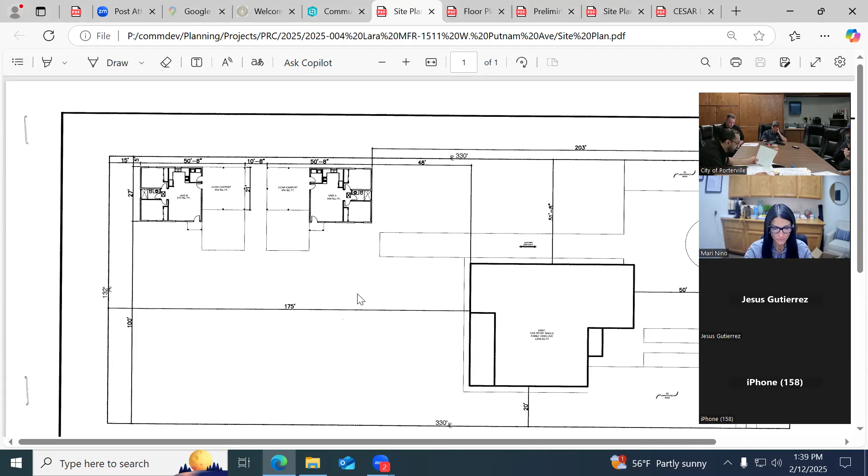If you do propose any future signage, multifamily projects are permitted one building-mounted sign and one monument sign not exceeding 32 square feet. And that's all comments from planning. With that, we'll pass it along to the fire department with Clayton.

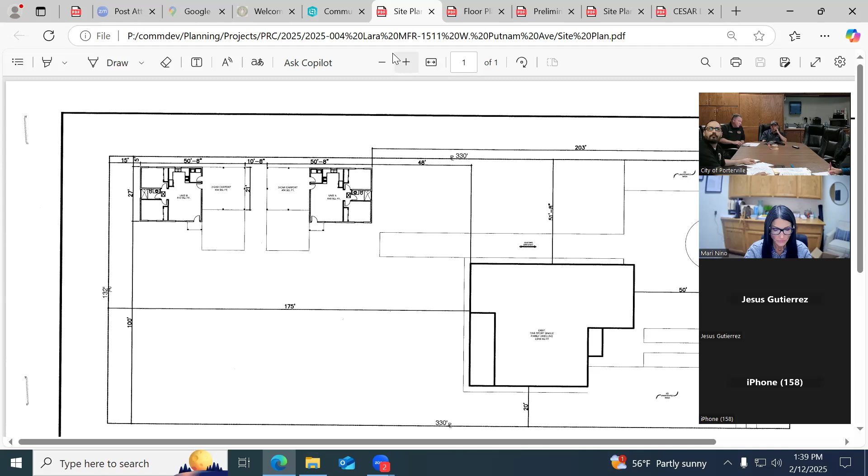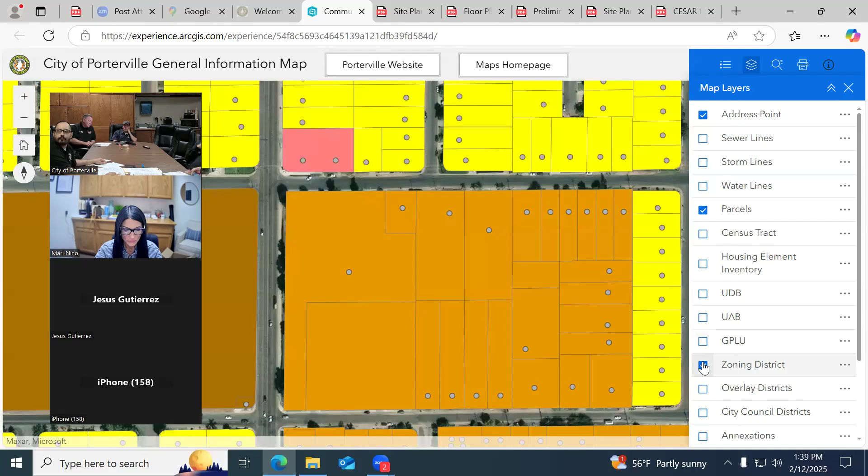So the project shall comply with the latest applicable codes. Fire hydrants shall be placed at spacing no greater than 300 feet for commercial, multifamily, and mixed-use projects, measured as the hose lays, not in a straight line or with a radius.

Where two or more on-site hydrants are required for the project, the fire hydrant shall be on a looped system. Depending on the location of existing fire hydrants and required fire flow, additional hydrants may be required. All hydrant locations shall be approved by the fire department.

On-site fire hydrants and mains shall be provided where required by the code official. Fire hydrants located across a public street shall not be utilized for calculations or considered available to meet fire flow and/or FDC connection requirements for projects. No structure shall be greater than 400 feet from a fire hydrant.

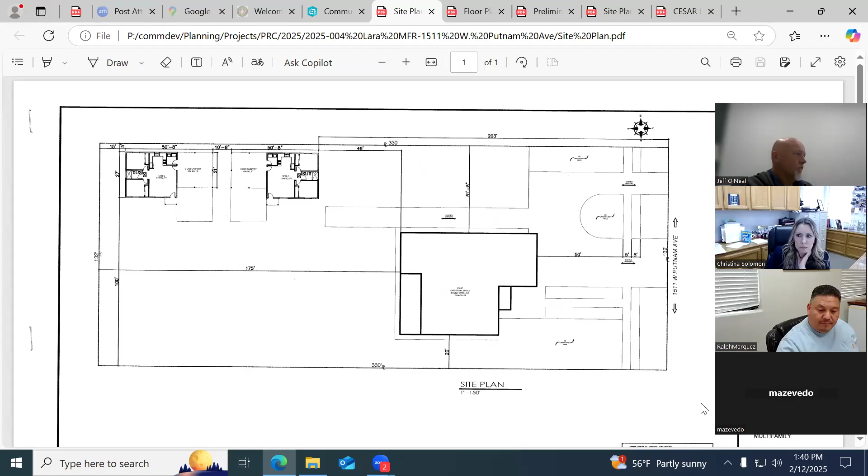All hydrants must be in place and accepted by the fire department prior to combustibles being brought on site. If common driveways are 150 feet or greater in length from the public street, the fire department access road and required turnaround shall comply with the currently adopted edition of the California Fire Code. You will need to show this area designated on the site plans.

An approved fire apparatus access road shall be within 150 feet of all portions of the exterior walls of the first story of the buildings, as measured by an approved route around the exterior of the building. It is measured as the hose lays. Please show this designated area on the plans as well.

Required fire apparatus access and turnaround signage and markings shall comply with Appendix D of the California Fire Code and the California Vehicle Code. Maintain a minimum of 20-foot roadways for fire department access, which has to be an improved all-weather hard surface. Address numbers shall be posted on the buildings and shall be visible from the street. Installed numbers shall contrast with their background. The project is to meet the minimum fire flow requirements per the table in Appendix B of the most recently adopted edition of the California Fire Code.

So, are there any questions? It's standard comments, so there will need to be some modifications to what was submitted. Whether it be you show and designate the fire lane and turnaround to keep the buildings at their locations, or you move the buildings closer.

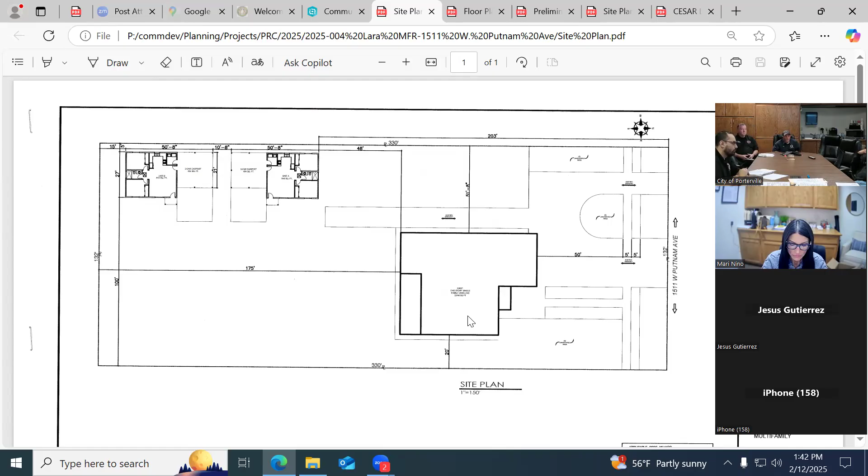Next with our police department, Mark, any comments on the project? No, sir, no comments. Thank you.

And that's all comments from the departments. Does the applicant have any questions at this time? Is it a requirement to make the fence?

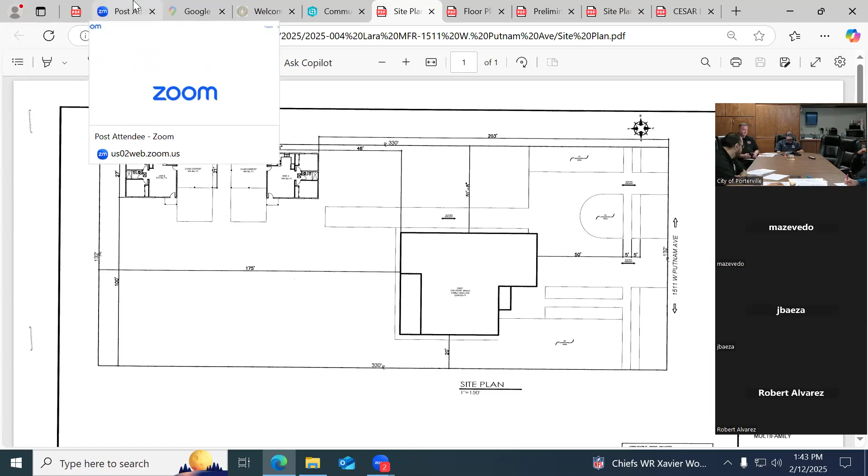Not a requirement, but if you do want to upgrade your fencing, we just provide those standards. But yeah, just again, identify areas like the private open space and the common open space for the development, which are just identifying on the site plan and meeting our minimum standards, which is 100 square feet per unit.

Hey Oscar, let me just chime in here for engineering. Right, Javier? So I know all the public improvements were installed with the house, but with these units, they'll just require utilities to go back there, water and sewer services. Thank you, Javier.

Yes, and then we'll compile each department's comments on a letter, and the applicant should receive them in about 2 to 3 weeks from today's date. Okay, thank you. Thank you.

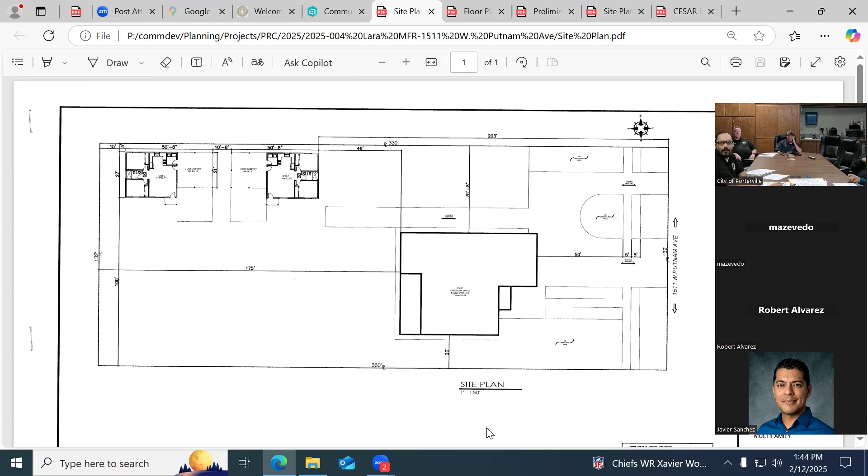Next we have item number 2, which is PRC 2025-005. Want to join us at the table?

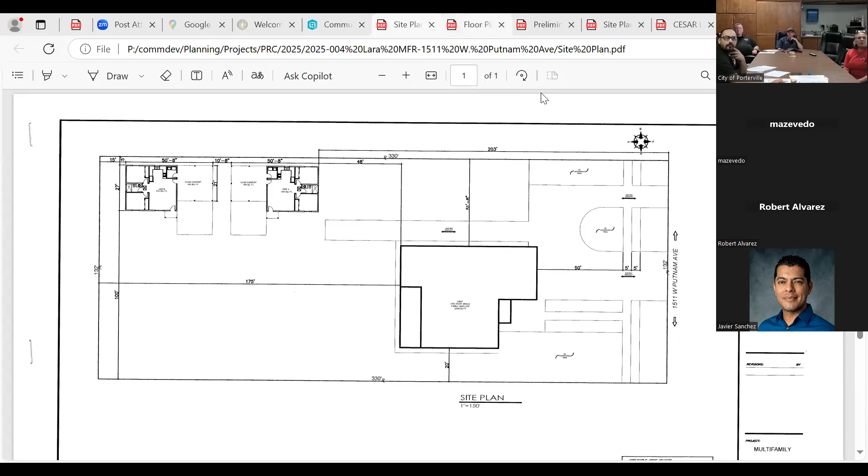All right, so we have the next item, which is PRC 2025-005. The applicant is proposing a change in occupancy from the previous use of retail sales to instructional services located at 234 North Main Street. The property is zoned downtown retail north of Olive and also has a general plan of downtown retail. The property also is within the downtown overlay.

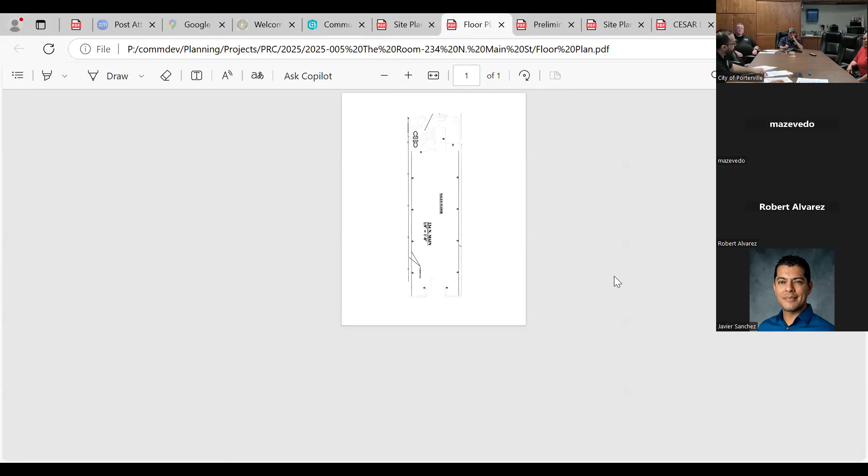As far as comments from planning, the use is a permitted use within the DRN zone district, which falls under instructional services. Comments from planning would be majority related to any signage that you'll be proposing for the establishment, complying with chapter 305 of the development code and also our downtown design guidelines.

Signs are required to be illuminated, either internally lit, or you can also have external lighting for those signs, and those are the wall signs. You can also have window signs not exceeding 50% of the area.

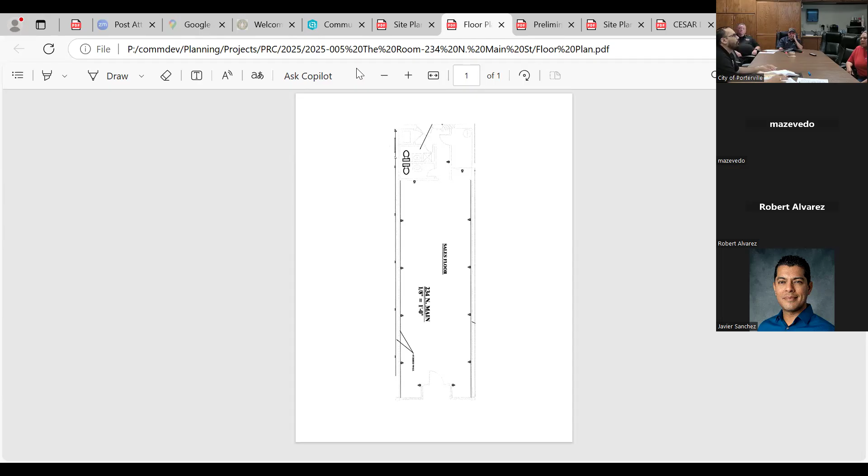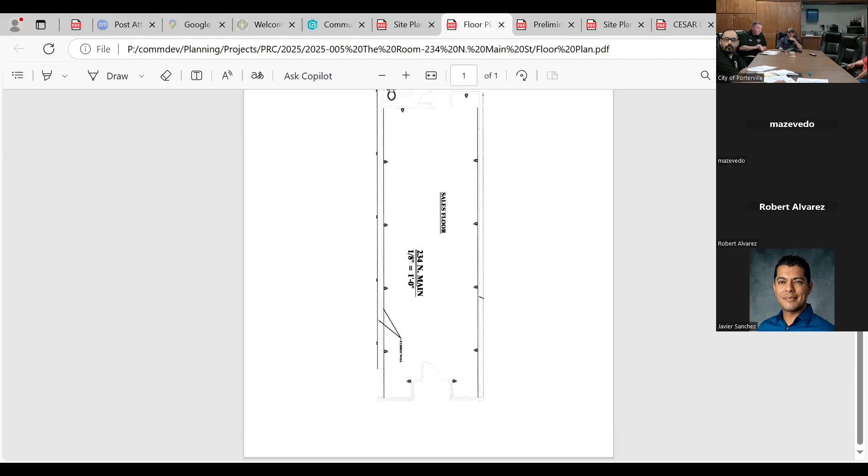Okay, those are all comments from planning, and next we'll go with fire department. For this project, it shall comply with the latest applicable codes. The occupant load needs to be determined so that it can be verified by the building and fire departments. Once that's determined, the occupant load will need to be posted inside the building. Fire extinguishers shall be placed to comply with the currently adopted edition of the California Fire Code.

Fire extinguishers should be no further than 75-foot travel distance from each other, mounted in a readily visible and accessible location, no closer than 4 inches to the ground and no higher than 48 inches to the top of the extinguisher. Knox box access would also be required.

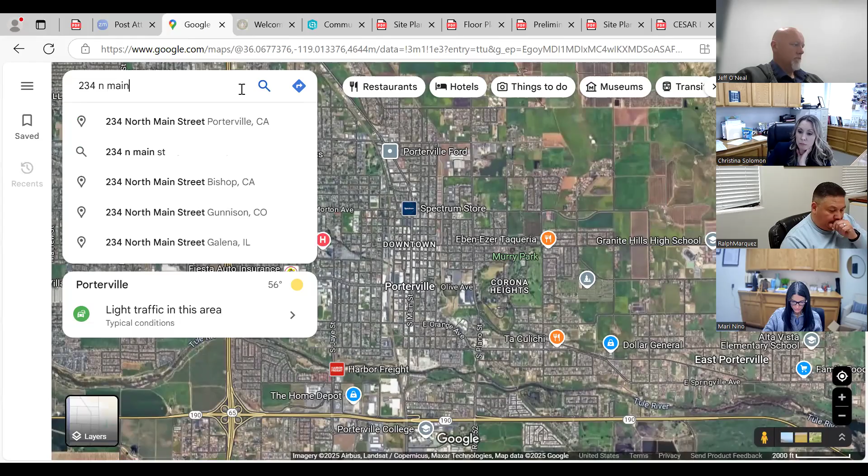That building is under one ownership, and it is sprinklered, so there may already be a Knox box on the building. We just need to verify based on the distance and location — we may just include that suite in the existing box. So that's it from the fire department.

Regarding the window sign, yes, that is allowable under the Porterville Development Code because it doesn't exceed 50% of the coverage of the window.

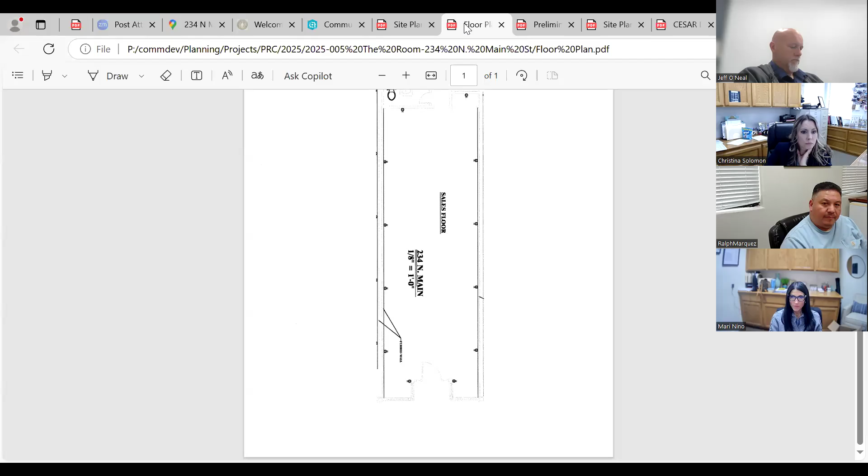If you want to propose any signs on the wall of the building, it will require a permit and must meet our minimum standards. Thank you. Next with our building department, James.

As Clayton mentioned regarding occupant load, we will need the exact measurements of the floor area. The building is sprinklered, which is good news. Based on the measurements of the building, we would go to the code book and figure out the occupant load based off of that.

The only thing I see is if the occupant load exceeds 50 people or more, your second exit — the back door — would have to swing out instead of in, and it would have to have panic hardware, like a crash bar. Then you would have to install some exit signs, the lit-up ones that say exit.

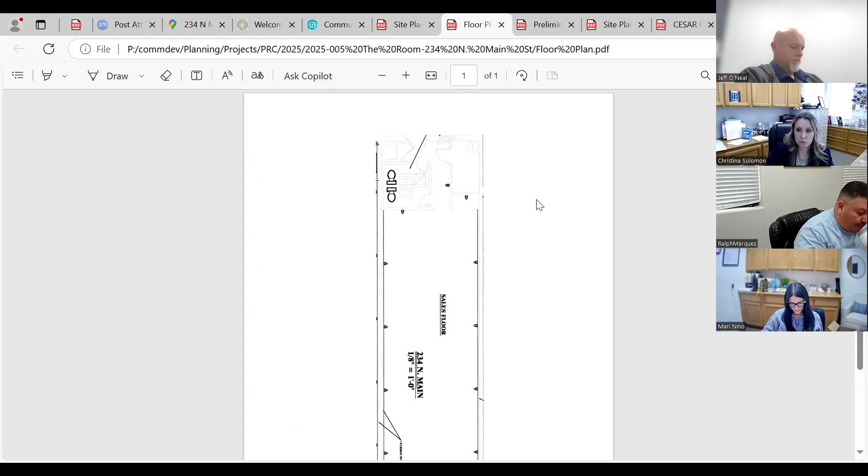They already have those. You would also have to have emergency lighting in there, so if there's a power outage, lights would come on. But this is only if occupancy is over 50.

To determine that, we need more information from you — the square footage, some measurements in there.

So if you could just get back to us on that, we can figure that out pretty quick and help you out, because it's been closed for about 3 weeks. We really just need the internal measurements so that it can be calculated.

Every room, every open space — just those measurements. Your draftsman can get that for you guys, whoever prepared this.

Thank you. Next with Javier, with engineering. For this one, engineering has no comments.

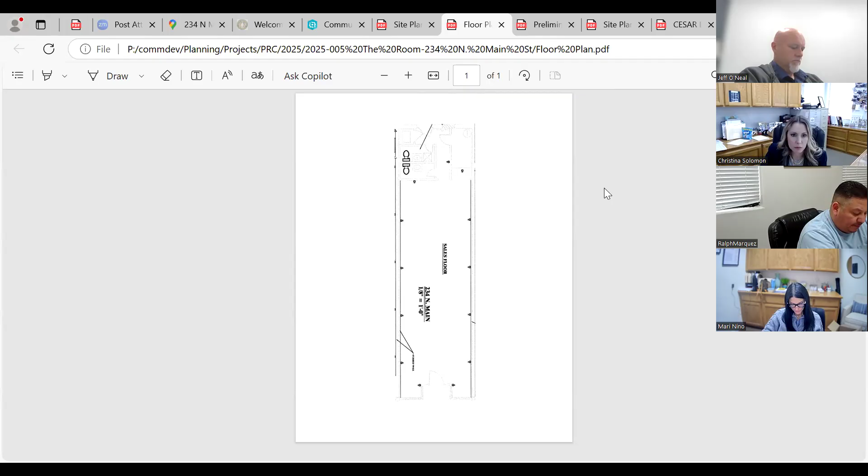Thank you, Javier. Next with Public Works, starting with Robert — no comments. Thank you, Robert. Joe, any comments? No comments. Thank you. Next with our police department, Mark — no comments. Thank you, Mark.

Does the applicant have any questions at this time regarding today's project? I do — once we get the square footage sent over, how soon can we start having the class again?

We've been out almost 3 weeks. Have you applied for your business license? Yes. Okay, after this process, you will receive the letter in about 2 weeks from today's meeting.

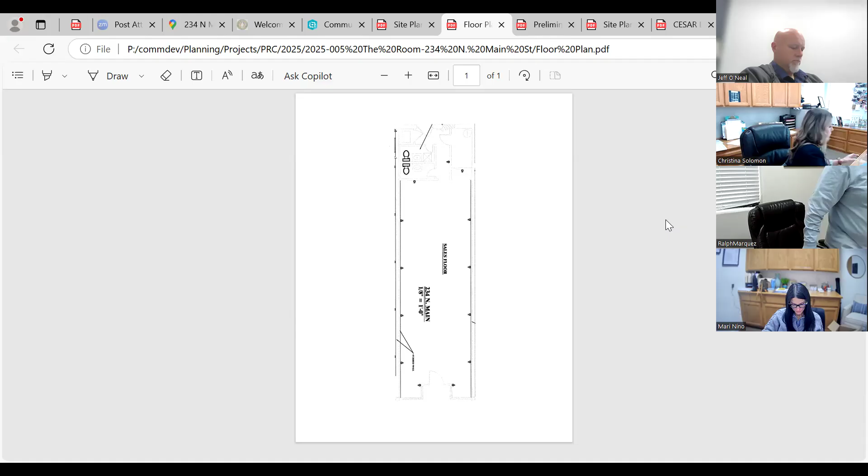If you're able to meet all the department's requirements, then we'll be able to sign off on the business license. Each department would have to sign off on it. For planning, it is permitted, so it's just about complying with the other departments. The sooner you're able to get those measurements, the quicker we'll be able to proceed.

So do we have to wait an additional 2 weeks? No — as long as you're able to get your business license signed off by each department, we'll make sure to review your application against whatever requirements each department has. We're not going to be able to sign it off yet, because we have to make sure it would meet those requirements.

Right, all the comments we just mentioned — but the sooner you can get that to us within those 2 weeks, just bring it in and drop it off to us, and we can get that started. That way, if you need to make modifications at the back door, you can get a contractor and get that process started.

Okay, thank you. Any of that stuff — say you have to do the back door, add emergency lighting, all that stuff — you would have to submit for a permit.

And if everything is up to par, the only thing would be the square footage. We need to determine what else is required, and how many people, so the longer that takes, we can steer you down a path to get started making any modifications you need, or rule out that modifications may not be needed.

And that open space there, there's nothing in there, no furniture, no workout benches. Nothing, it's as is, just an open room. Sooner we get that, the sooner we can help you.

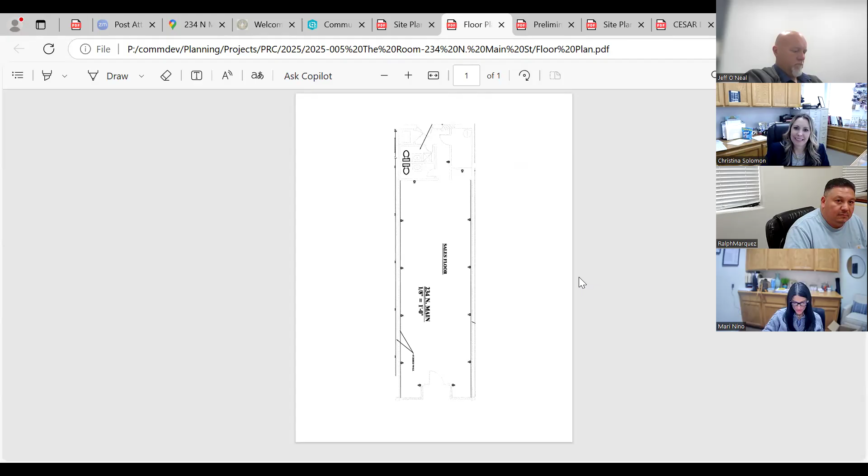To your left. Thank you, all right, thank you.

Next we have item number 3, which is PRC 2025-006 for Villas at Winding Creek. All right, let me go ahead and share my screen here.

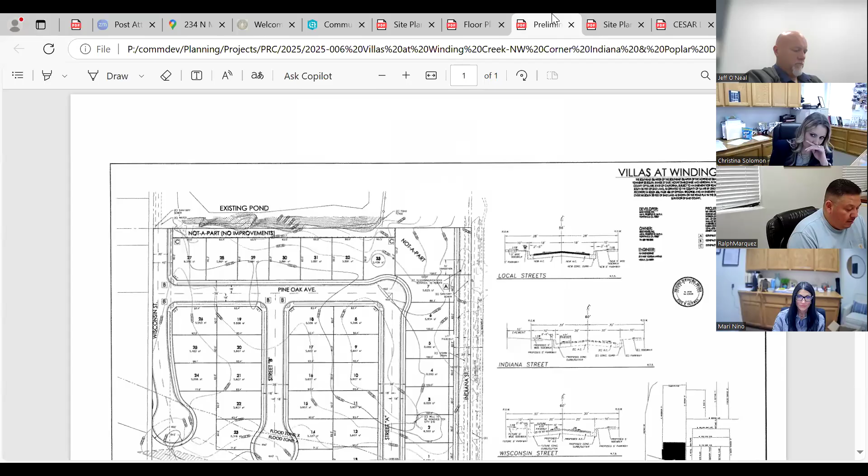So we have the applicant proposing a subdivision map: a 33 lot, single family residential subdivision. It is located on the northwest corner of Poplar Ditch and South Indiana Street. The project is zoned low density residential and has a general plan land use of low density residential.

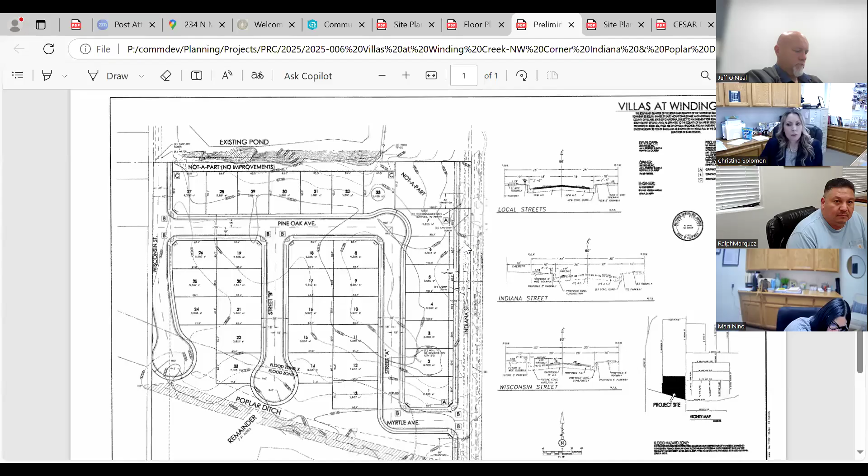For the planning side, I'm going to go ahead and present the comments. The applicant is proposing a subdivision map which requires entitlements. First, we would have to go through a tentative map, there's an application for that and some fees. The fees for a tentative subdivision map is $3,004, plus a $39 per lot fee.

The project will require a CEQA review of the development, which our environmental consultants would prepare the document for and make the determination for the level of environmental review the project would require. The project will also require a public hearing for the tentative subdivision map.

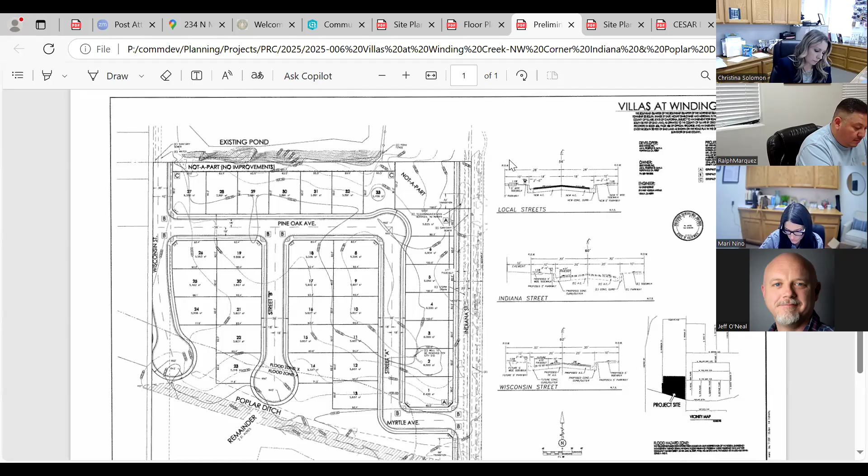As far as comments related to the design of the project, there are some lots being proposed that do not meet the minimum square footage, which for this zone district requires a minimum of 6,000 square feet per lot. The applicant can propose a small lot subdivision, which would require processing a conditional use permit.

As far as other comments from planning: complying with section 20104 for residential single-family development, meeting the minimum setbacks, lot coverage, and landscaping standards, for example. Complying with the minimum architectural articulation on all facades that face the street. Any fencing proposed complying with section 300.03 of the development code.

As far as meeting the guiding policies of the general plan and the development ordinance, it will be required to provide street tree planting, like parkway trees, as part of our urban forestry program. After the tentative map has been approved, the applicant will be required to do a final map as outlined in section 405 of the Porterville Development Ordinance.

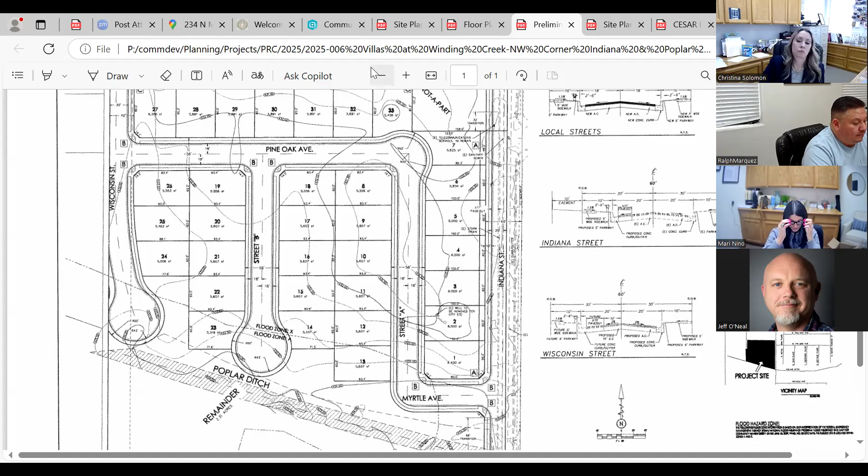Next, with our fire department: this is primarily going to be single-family residential properties, so it shall comply with all applicable codes. Fire hydrants shall be placed based on distance no greater than 500 foot spacing for residential applications. The fire hydrant system shall be looped through the subdivision.

No structure shall be greater than 400 feet from a fire hydrant, and the subdivision must maintain 2 points of entry and exit. If this goes out for any further reconfiguring, it still has to have 2 ways in and 2 ways out.

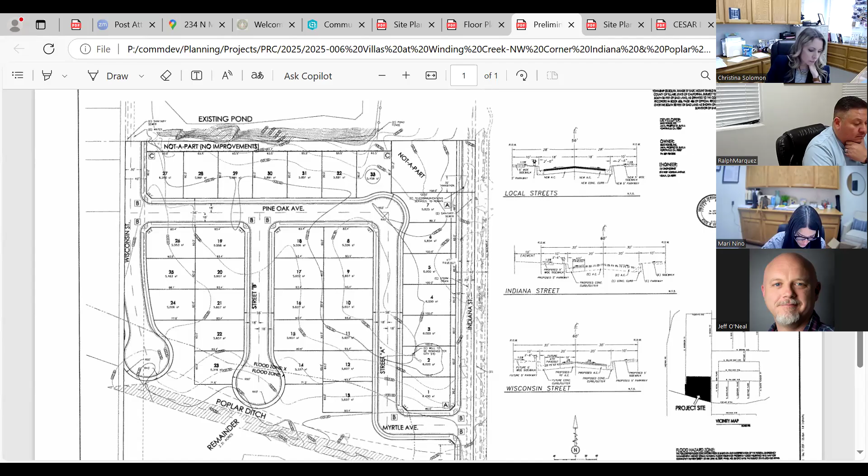Thank you, Clayton. Next with James, no comment. With building, no comments. Next with Javier Sanchez with engineering.

All right, thanks, Oscar. For engineering, it looks like local streets in Indiana, all the street cross sections, they look good. One thing we would be asking for is...

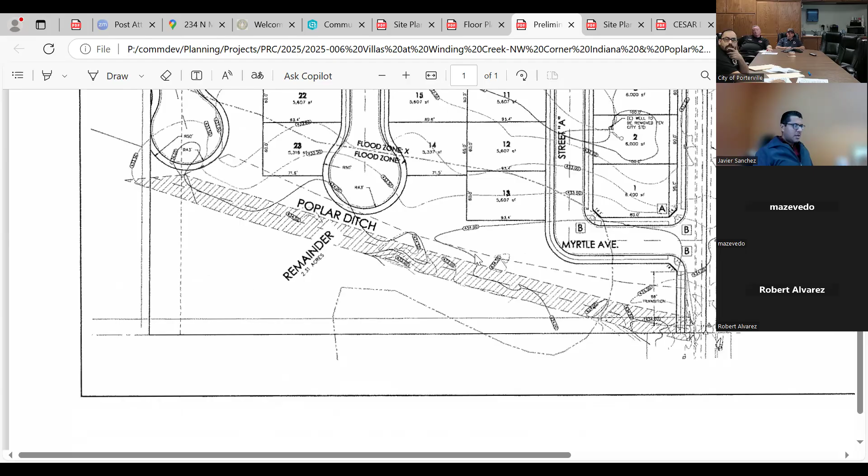That dedication and easement continue south of the proposed Myrtle Avenue, just because there's going to be a project to extend the length of that culvert crossing over the Poplar Ditch. So if that can just get extended to the property line, that would help that situation.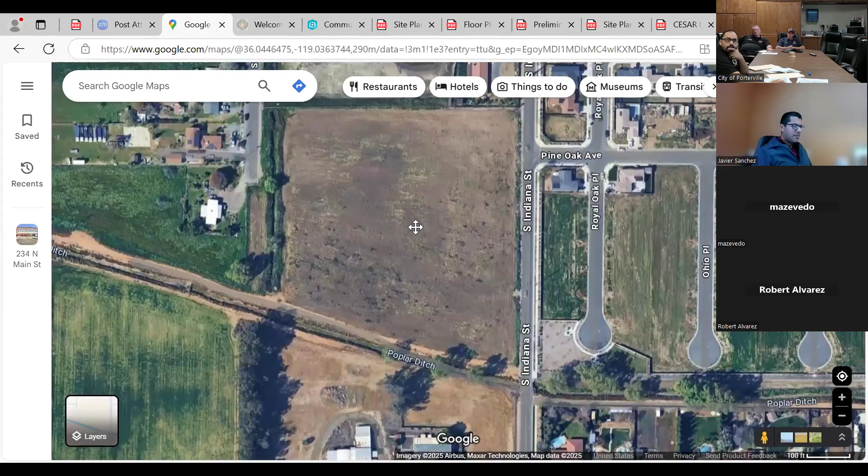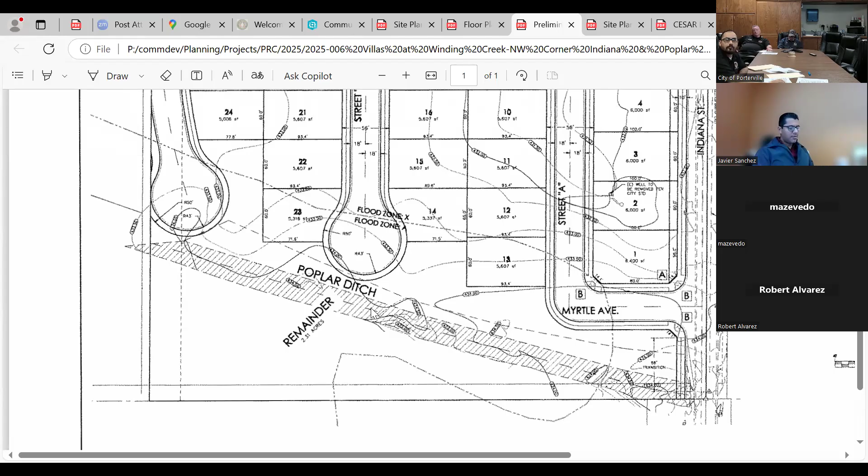There are a few lots, as you can see there, lot 13 and 23 for sure. Not sure where the structure will land on lot 14, but with those being in flood zone A, they would have to be a removal process to make sure those are not built within the floodway or flood zone. So we'll have to go through those processes as outlined through FEMA procedures. It would have to go through FEMA, or we could build those lots up to remove them.

We have a floodplain ordinance that I can share, and that'll give us the process to address that. Thank you.

And then lastly is maintaining an easement, because there's currently a need for a recharge line. It exists now, but we just need it to be within an easement. We're thinking the Wisconsin Street right of way would be best. It's like a storm line, but more like a groundwater recharge line to go from the Poplar Ditch to that basin, and it can be within street right of way.

Okay. Just so that's maintained.

I guess just one last small comment is the bulbs on the cul-de-sacs. At curb face, they would need to be a minimum radius with a diameter minimum of 96 feet. So that would be, can't think right now, a 48-foot radius. Yeah, they'll just have to get a little bit bigger.

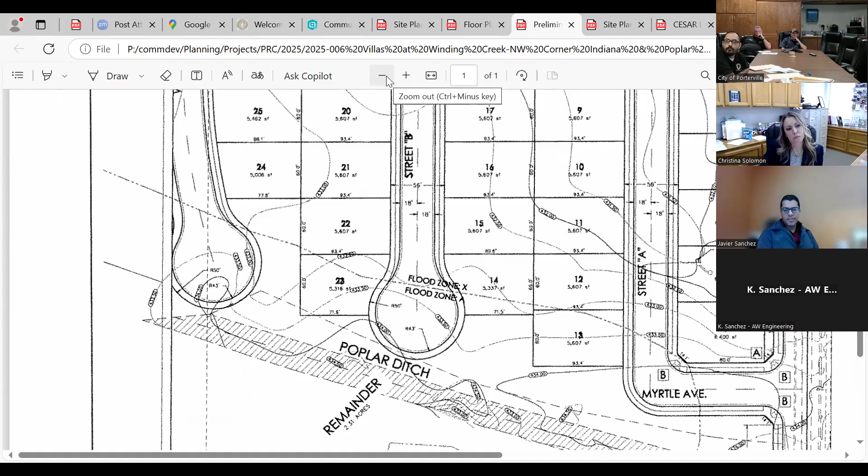Hey Javier, this is Sean at AW Engineering. Does the city have a standard for those, the 48-foot radius on the bulbs? Yeah, so... we need to revise it, but it is what's in the fire code.

And so I'm calling that out because it's part of the street, but the authority is currently coming from the fire code. We just need to update our standard to comply with that. It's currently not shown correctly. Okay, we'll get it updated.

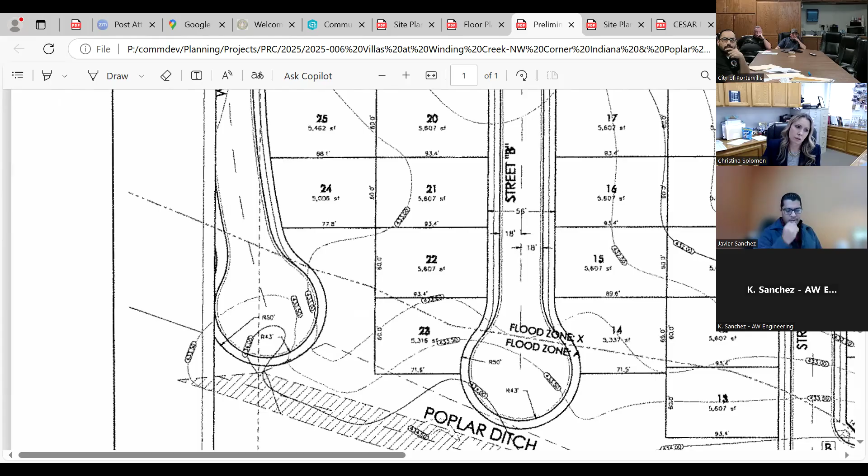Okay, and then when you say you need an additional right-of-way dedication south of Myrtle, are you saying take Myrtle's south side right-of-way and extend it all the way down to the ditch? No, it'd be more so the Indiana Street right of way.

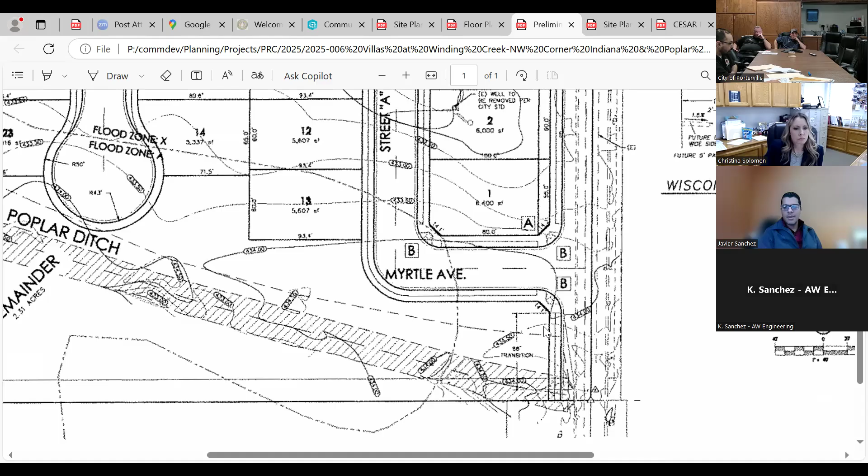Okay, an easement, yeah, the north-south. Yeah, so just like you have north of there where it's 10 foot from curb face for the right of way, and then the 10-foot landscape easement, the same would be south. Okay, that makes sense, extend that block wall easement south of Myrtle. Correct. Okay, thank you.

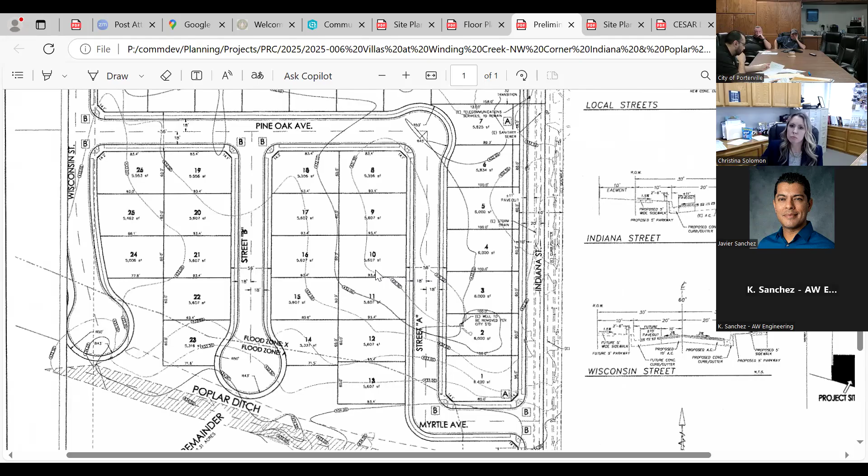Next with Public Works, starting with Robert. No comments. Thank you, Robert. Next with Joe.

The only thing I see is when you're coming on Myrtle, coming onto Indiana, I don't see where they have a stop sign, stop bar, and legend. That will need to be installed right there. And that's all the comments I have.

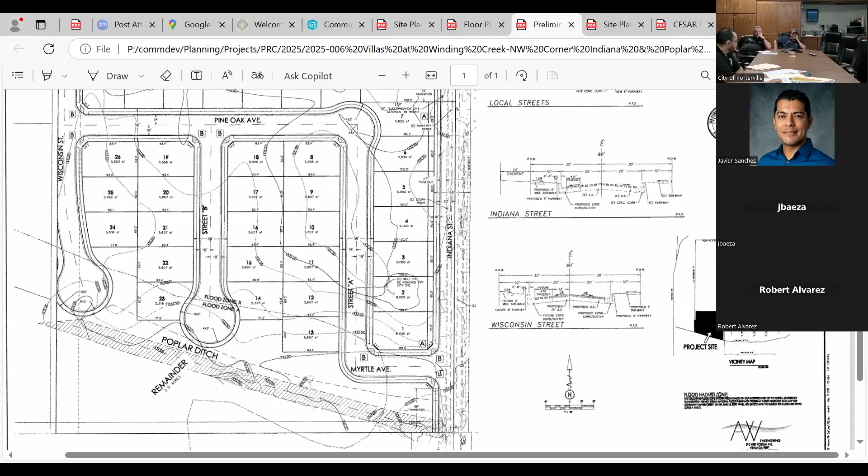Next with our police department with Mark. No comments. Thank you, Mark.

All right, that is all comments from staff here. Are there any additional questions from the applicant at this time?

Clarification, if you don't mind. Sorry, is somebody else saying something? No. Go ahead, Christina.

The lot size for those lots that are under 6,000 square feet, you said a conditional use permit would be needed. You'd also mentioned the cul-de-sac size. Can that be all on one conditional use permit, or do they have to be separate?

It could be under one conditional use permit application. You will have to identify on the application what the request is. So yes, if we're proposing lots under 6,000 square feet, it can be achieved through a small lot subdivision, and we'll process that through a conditional use permit as part of the entitlement process.

We also have in our development code, section 400.05, authority to vary regulations. In this case, the cul-de-sac exceeding 20% of the lots, that could be something you could include as part of your conditional use permit request. Perfect, thank you.

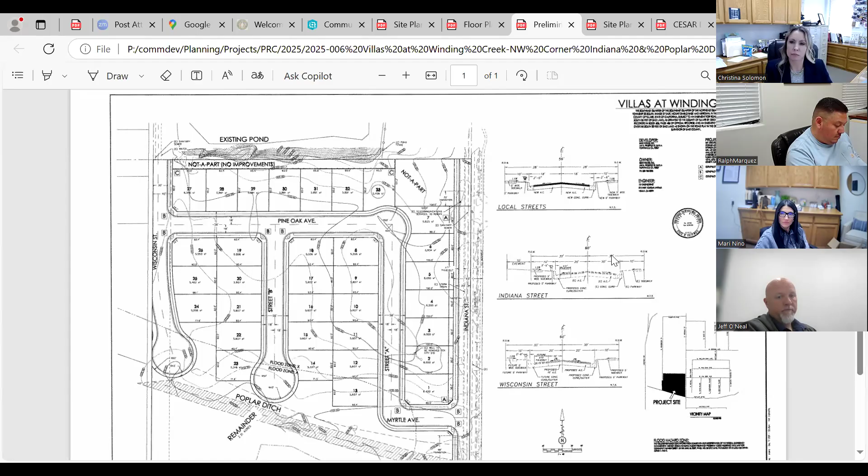Yeah, on that cul-de-sac, I thought it was per the city standard. I thought they had a specific distance that they were going by. Am I not seeing that somewhere? There's also a maximum distance of not exceeding 600 feet. Right.

Under 400.05, we do have a process to vary regulations, and this could be something the applicant can request. It would be a discretionary approval with a public hearing, and city council would be the final determining factor.

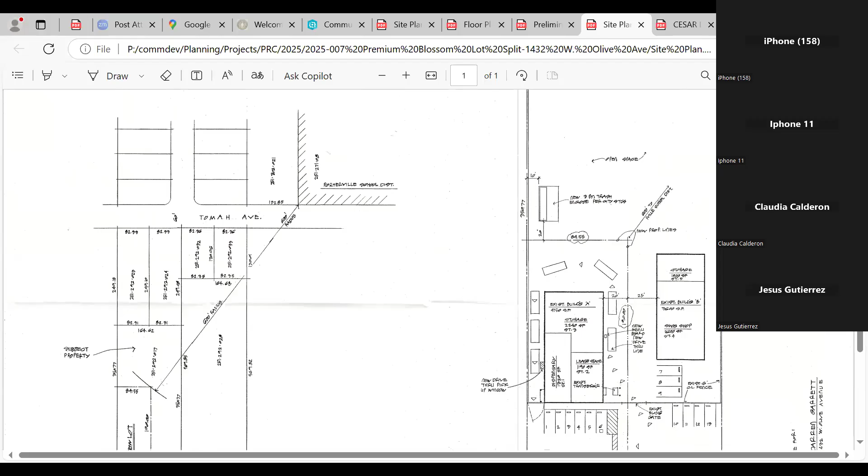Kind of 10 feet back from that wall. About 50 feet back from that wall. I can't remember, I think I measured it once. The overall length of the lot is almost 400 feet deep, so it's got to be no more beyond 300. I can't remember what we measured that day. Well, that'll just be a standard comment until you improve it with a hydrant, and then we don't care what you do back there.

And that just tying into the fire hydrant we put in and running it back to the back, right? So if you have more than 1 hydrant, the system has to be looped, unless you do another connection. You could have 2 single connections, but if you have 2 hydrants on the same line, it has to be looped where water comes from both directions. But if they're on a single dead end line each, that's acceptable too. And then if something develops behind you, or they have a water line that runs through or next to you, where you can do an easement and tie across, that would be the time. Well, they don't plan on doing anything back there, and we haven't had any issues out there. So I just have to officially say that.

Thank you. Next, with building. And this is just for the lot split, right? This is the lot split and a proposal for a text amendment to allow the cannabis dispensary in the CG zone district. No, okay, no comments.

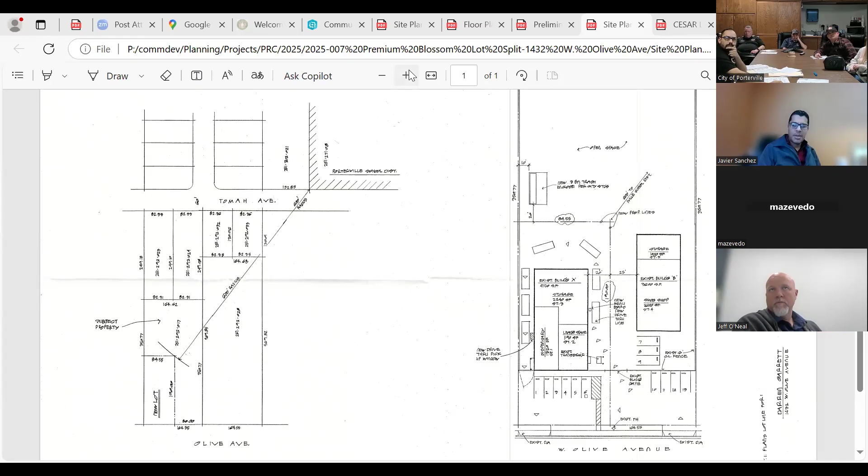Next with our engineering department, Javier. The only comment we'd have is that once the parcel split's done and building permits come in, there may be comments for the public improvements. But for the lot split itself, we'll just review the map. That's all the comments we'd have.

Thank you, Javier. Next with Public Works, with Robert. Since this is a commercial building, you will need backflow devices on all water services. That's all the comment. Thank you, Robert.

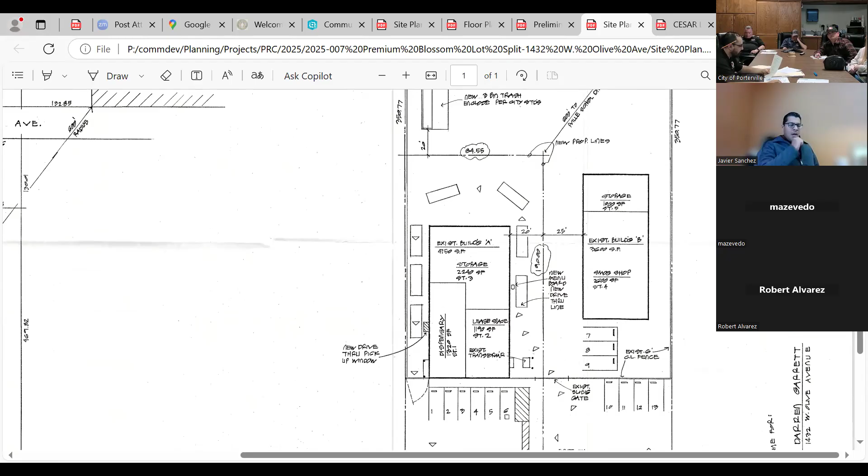Next with Joe, no comments. Thank you, Joe. Next with our police department with Mark. No comments at this time. Thank you, Mark.

All right, those are all the preliminary comments from staff at this time. Are there any additional questions from the applicant?

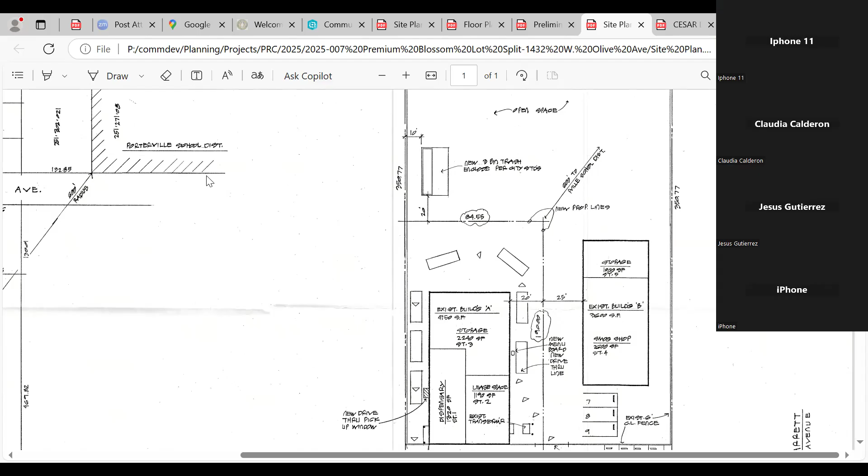No, so we just need to submit a map for the lot. Yes, it'll be a tentative parcel map application. It will be required. Do you have that application? We have the application, yes. It's called a tentative parcel map, since you're dividing the existing property into 2 lots. It does require to be prepared by a licensed surveyor or a civil engineer licensed to do the work.

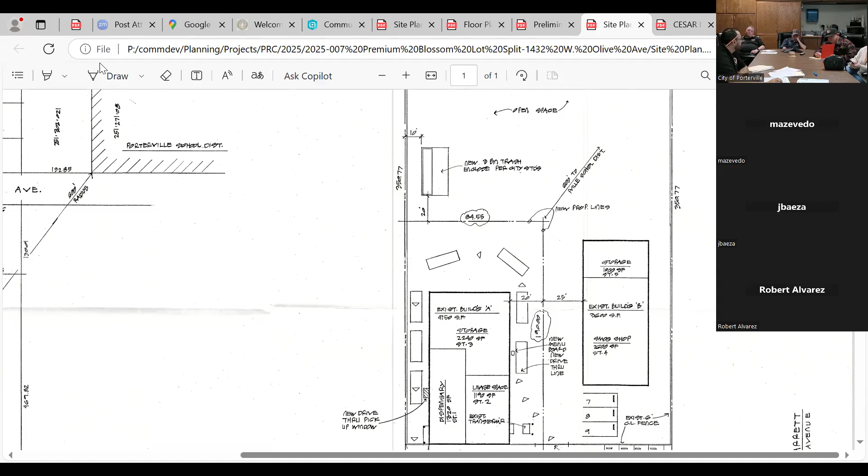And we'll be providing these comments in the letter in about 2 to 3 weeks. Okay, but do we get the paperwork for the tentative parcel map from you? Yes, we have a city application and we could provide it. And we give that to our civil engineer and have them do the work, correct. Okay, and then when can we get the tentative parcel map paperwork? We could give you an application after this meeting. Okay, yeah.

Any other questions at this time? No. Once we submit that application, what's the turnaround time for it to be reviewed? Javier, you want to answer that one, since it will be reviewed by our surveyor? Usually on the first submittal, it takes us up to 4 weeks. And then if there's any resubmittals, it speeds up within 1 to 2 weeks.

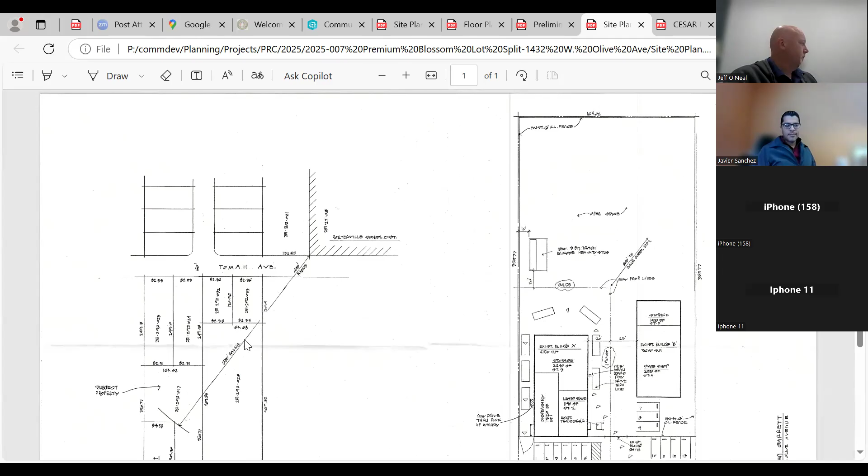Thank you. So yeah, we'll be providing the comments in about 2 to 3 weeks in relation to today's application. Feel free to reach out if you have any additional questions. Okay, but we'll just hang out and get the paperwork we need. Okay, sounds good. Thank you. All right.

Last on the list, we have our fifth item of today's agenda, which is PRC 2025-008 for the Ledesma subdivision. Let me go ahead and share my screen here.

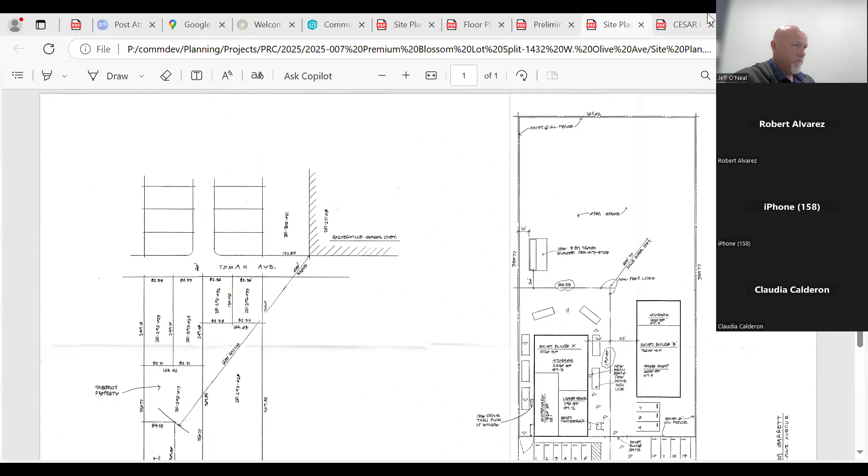Okay. Oh, okay, you're right there. You're on top of me, Brenda. Jesus. Oh, they're listening to me?

So for the fifth item, the applicant is proposing to divide the existing parcel at 916 South Cottage Street. The project is proposing a subdivision map consisting of 9 total lots. The property is zoned RS2 low density residential and has a general plan land use of low density residential.

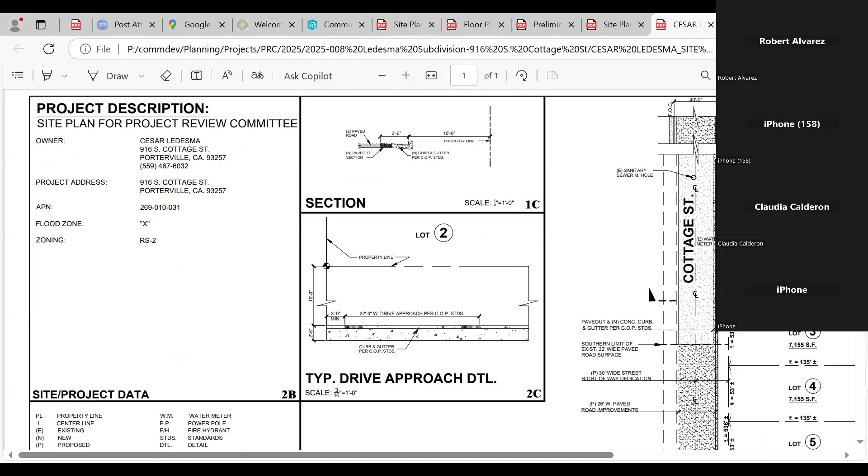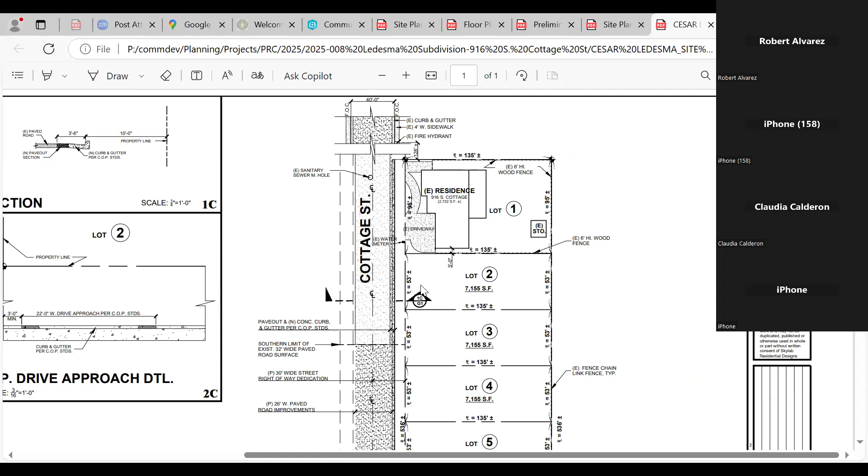So comments from planning are in relation to the minimum lot standards. For example, the RS2 zone requires a minimum lot width of 60 feet wide. The project is proposing 50 feet, 53 feet of lot frontage per lot. The applicant may propose an adjustment of the configuration or can process a conditional use permit as outlined in 400.05 to area regulations.

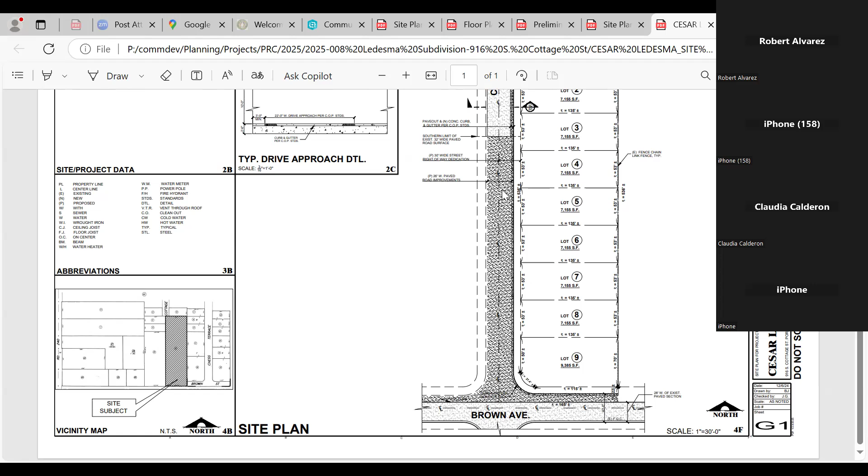As far as fees associated with the land division or subdivision map, a tentative subdivision map fee is $3,004, and there is a per lot fee of $39. This project will require an environmental review, which our environmental coordinator will identify in the PRC letter, along with what level of environmental review the project would be required to process.

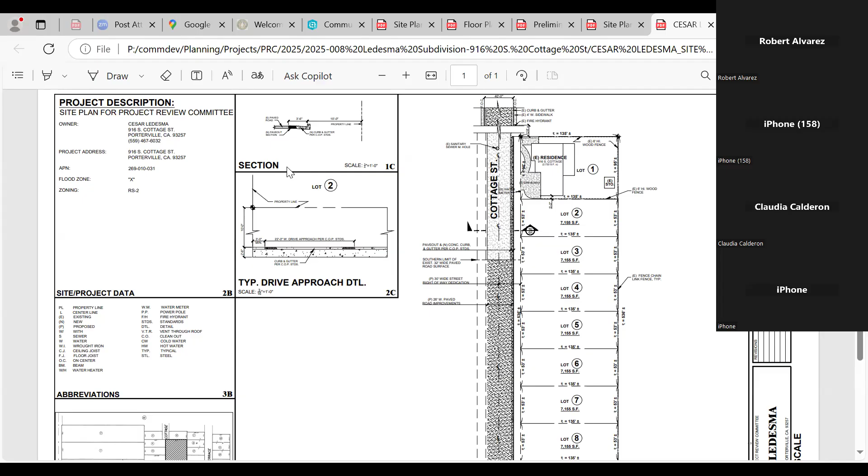Okay. And also, there are requirements as far as providing subdivision trees as part of the improvements. Any landscaping requirements complying with Chapter 303 of the Development Code. The development of each lot complying with Chapter 201 of the Porterville Development Ordinance in regards to setbacks, lot coverage, designs. And that's pretty much our big ticket items for planning at this time.

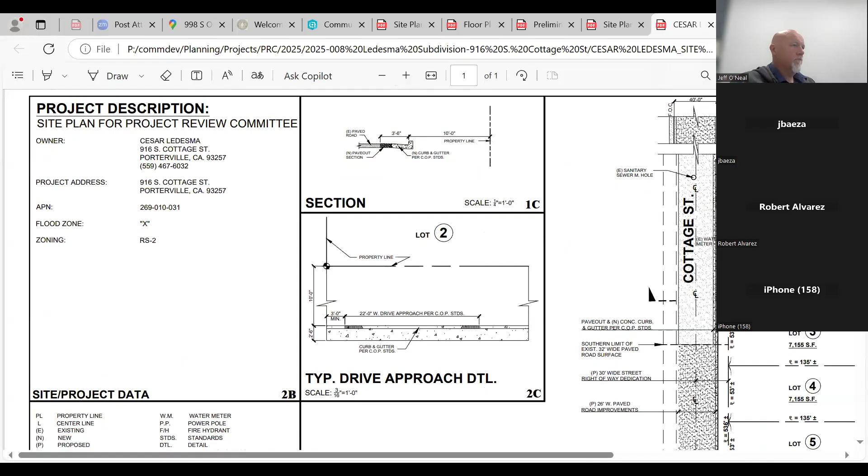And with that, we'll move along with our engineering division with Javier. All right, thanks, Oscar. For engineering, let's see, so you've shown that curb, gutter and sidewalk will all be built in front of the lots there. Will require a 3/4 minimum street, which is 10, 10, and 8.

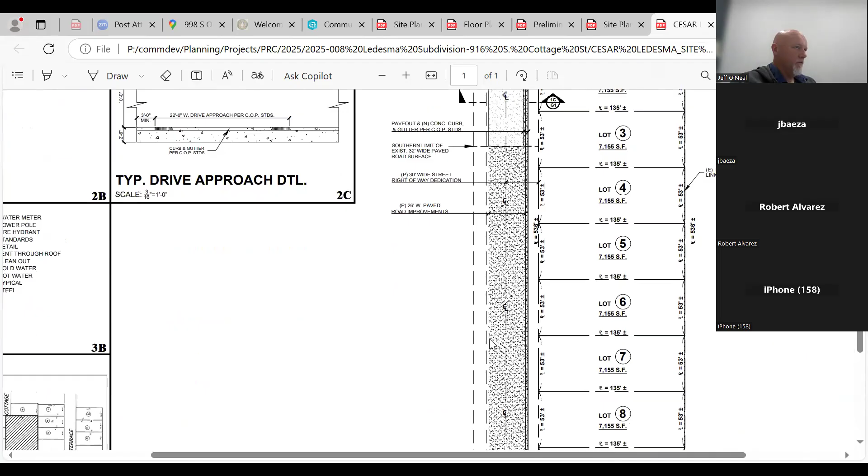So it's about 2 feet shy, so you'll just have to go out a little bit more. We'd require 28 feet because it's two 10-foot lanes and then an 8-foot parking lane. Then you have it showing tying into Brown Avenue, so that's good.

Water exists already through there. For sewer, you may have to extend it just a little bit more to capture that last 2 lots. And then of course there'll be street lighting required as part of those improvements, at least on the east side of where your development is. Right. So, but yeah, that's the comments engineering has.

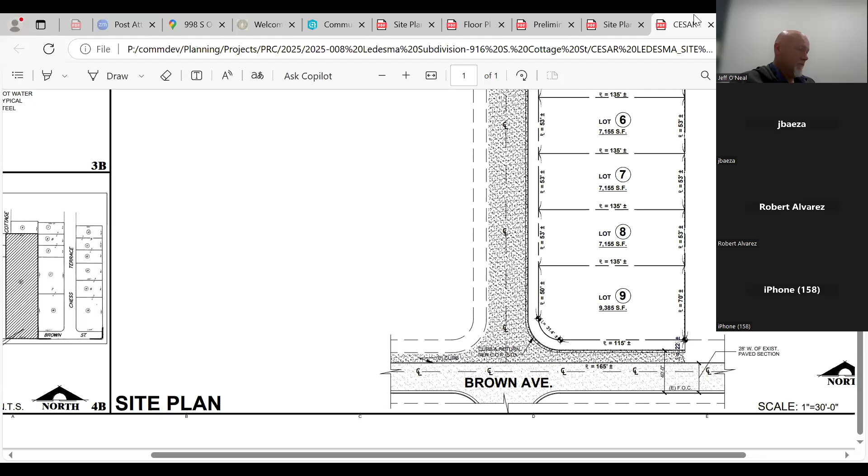Okay, sure. Next with fire department, Clayton. Project shall comply with all applicable codes. Fire hydrants shall be placed based on distance, no greater spacing than 500 feet for residential applications, and no structure shall be greater than 400 feet from a fire hydrant. So essentially, I'll have to put a fire hydrant in somewhere along that stretch there.

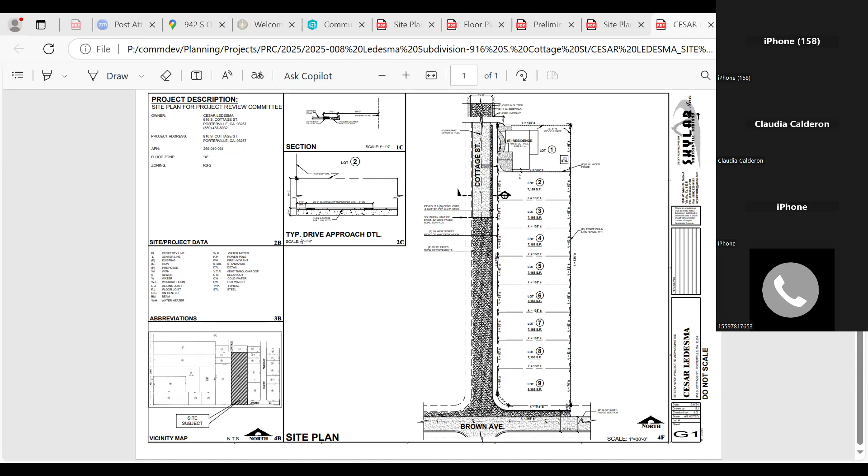What fire? Next with our building division with James. No comments. Thank you, James. With our public works department, starting with Robert. No comments. Thank you, Robert. Next with Joe. No comments. Thank you, Joe. Next with our police department with Mark. No comments. Thank you, Mark.

So those are all the comments from staff related to today's project. Does the applicant have any questions at this time for staff? Yes, that's Jesus Gutierrez, the agent. Hey, Jesus, yeah, how are you?

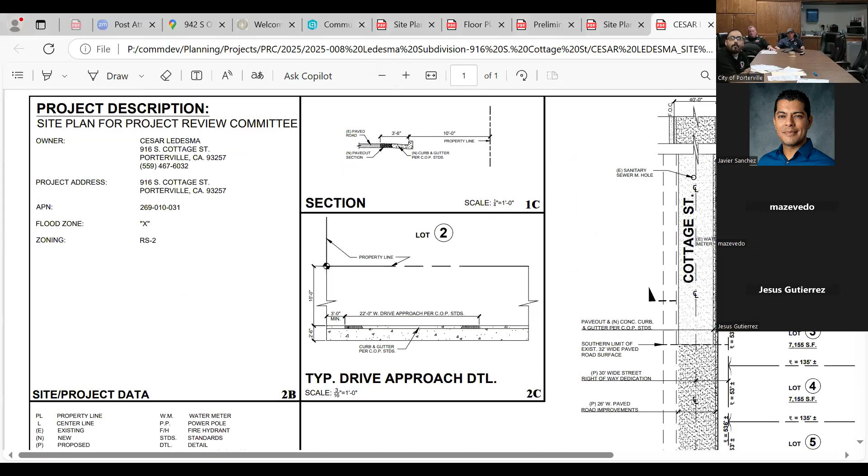How are you? So to get a variation on the width from 60 to 53, we have to go through the conditional use permit process, I hear, right? Correct, yeah, to deviate from the minimum city standards. Right, for this zone district, lots are required to be a minimum of 60 feet wide. Right, okay, yes, all right.

The applicant can either modify their lots to meet the minimums or can make that request as part of their tentative map, and we could process it through a conditional use permit. Okay, so the tentative map can be prepared for the subdivision, and then once it's prepared, it could be submitted with the request for a reduction in the width of the lots at the same time. Correct, and that will be a discretionary approval from our city council. Okay, all right.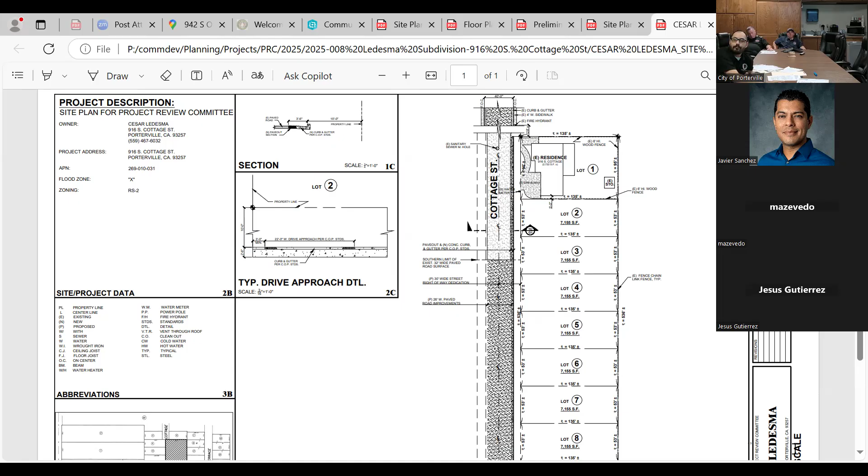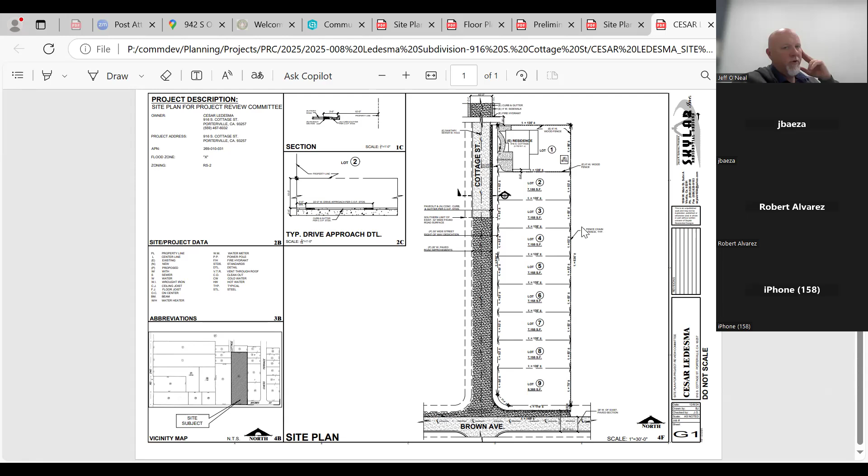What else do we have? We got the streets, 500 feet maximum, the fire hydrant distance. Okay, how long does it take to process a conditional use permit? Usually, I would suggest that the time factor is more dependent on the map than it is on the conditional use permit.

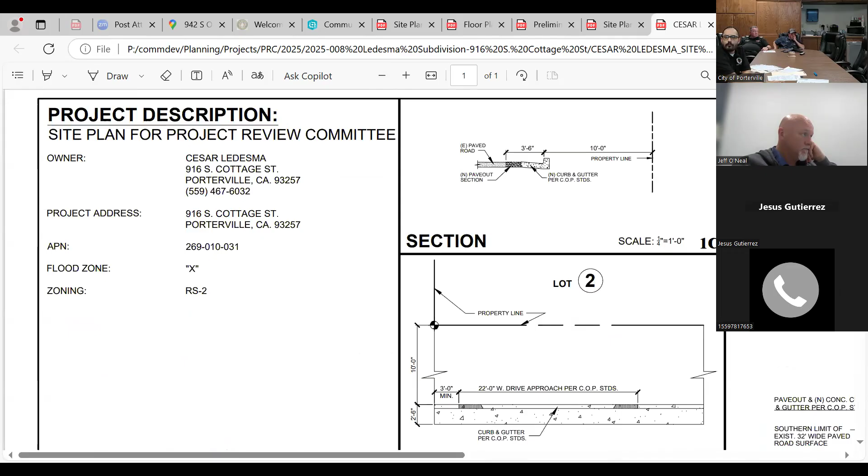Okay, all right. It would be taken to the same city council meeting. The conditional use permit processing is just kind of enveloped by the processing of the tentative map. Okay, all right, let's see. And the width of the street that you would want us to put in would be 28 feet wide instead of 26 that we are proposing, correct, with extension. Okay, all right. I think we're good for now.

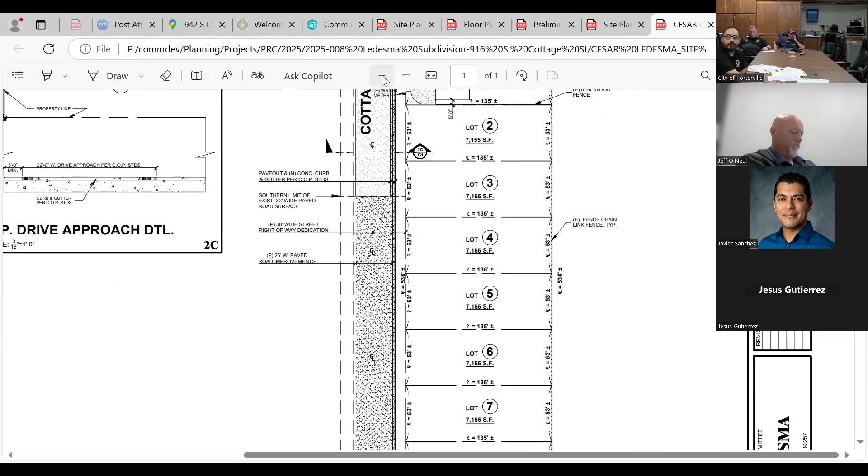Oscar, are you, or Cesar, are you there? It's Oscar, and yes, we'll be providing the department's comments in a letter in a 2 to 3 week timeframe from today's meeting. Okay, if you have any questions between now and then, just feel free to reach out and we'll be able to assist you with that. Okay, sounds good.

Cesar, are you there? Yeah, I am. Okay, so do you have any questions? I do have a question. I'm new to this, so I apologize if it's a dumb question, but because we're giving up half of the street and then some land on Brown Avenue, is there anything in return to us, or is it just basically given back to the city? Yeah, it's just a requirement of development. Okay, yeah, okay, gotcha.

All right, okay, nothing else, I think we're good. We'll wait for the letter to come in and then we can go through those conditions. Yes, thank you, Jesus and Cesar, for the application. Thank you. Yes, thank you all. Thank you all, thank you.